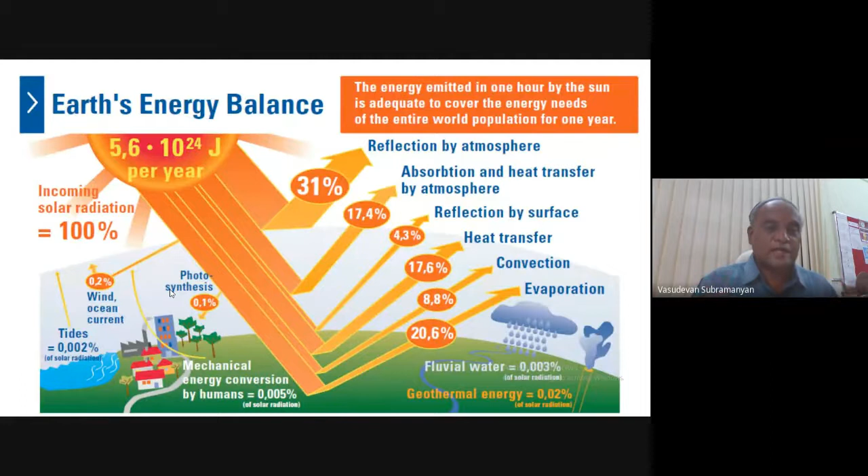Suppose we assume incoming solar radiation is 100%, but we are not utilizing the full 100%. We are utilizing only 0.3%. The remaining 99.7% is lost as reflection and absorption, reflection by surface, heat transfer, convection, and evaporation. Now every country is planning to utilize solar energy more fully. We use 0.2% from wind, 0.1% from photosynthesis, and some from tidal. Many efforts are going on, but we are unable to achieve 100% utilization of energy from the sun. So this is the thing about energy.

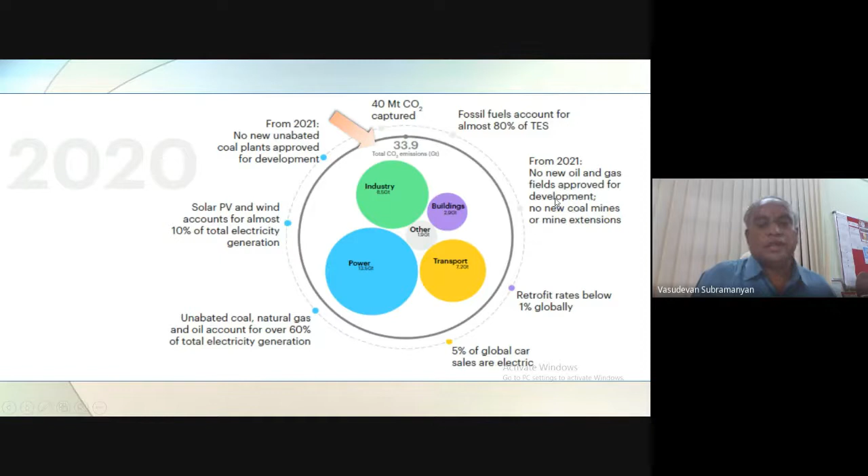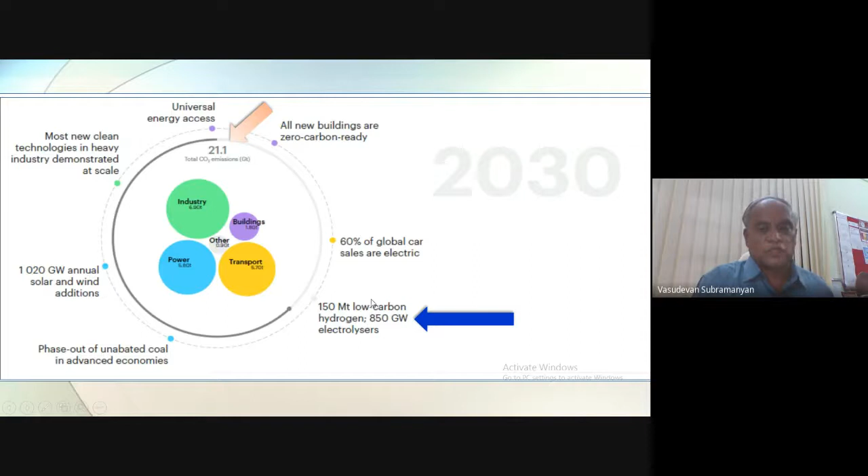That is 850 gigawatt electrolyzers are we are going to develop. So this is the impact we are reducing the CO2 in 2030. In 2040, we are still reducing to 6.3 gigatons of CO2 because of, you can see the electrolyzer capacity reaches 2,400 gigawatt, and oil demand is 50% of 2020 level.

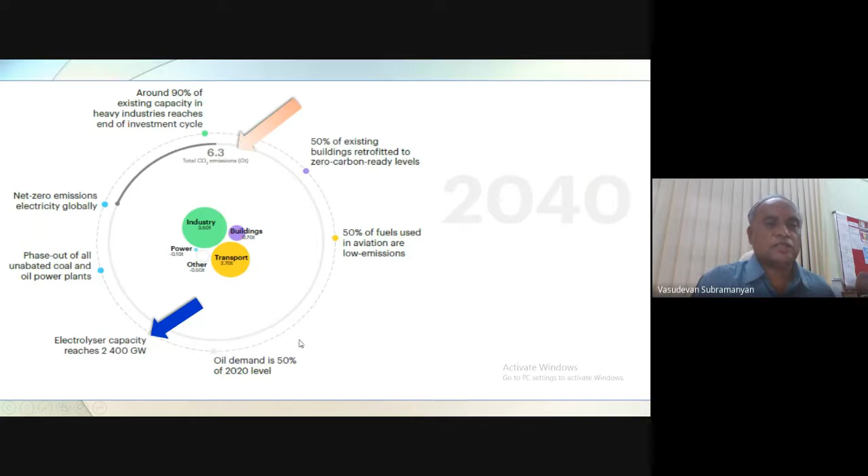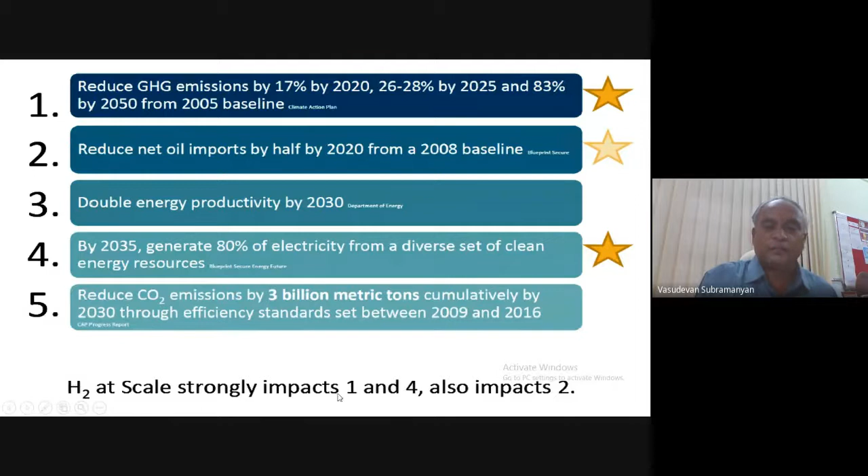You can see the SDG, they will call that how to reduce, and you can go for the SDG. There are reduce greenhouse gas emission by 17% by 2020, and 26 to 28% by 2025, and 83% by 2050 from 2005 baseline, and reduce net oil imports by half by 2020 from a 2008 baseline, and double energy productivity by 2030. So there are 5 points where hydrogen will be important, that is, hydrogen at a scale strongly impacts points 1 and 4, also impacts 2. So these are the 5 points where you can go for the SDG goal.

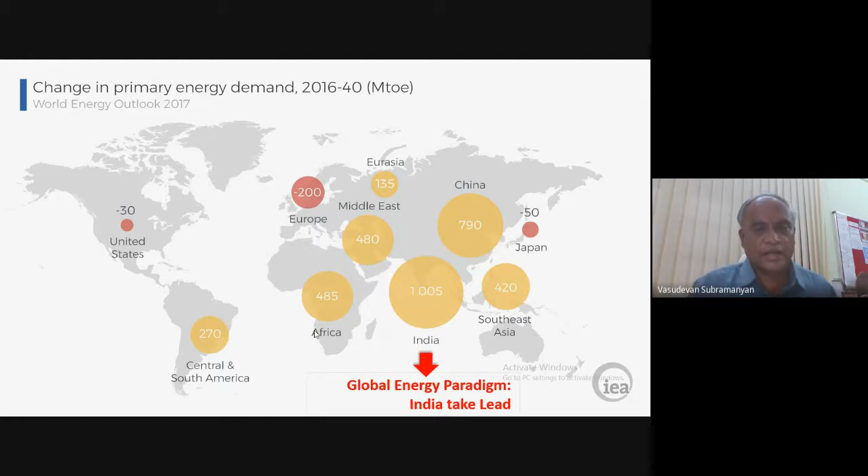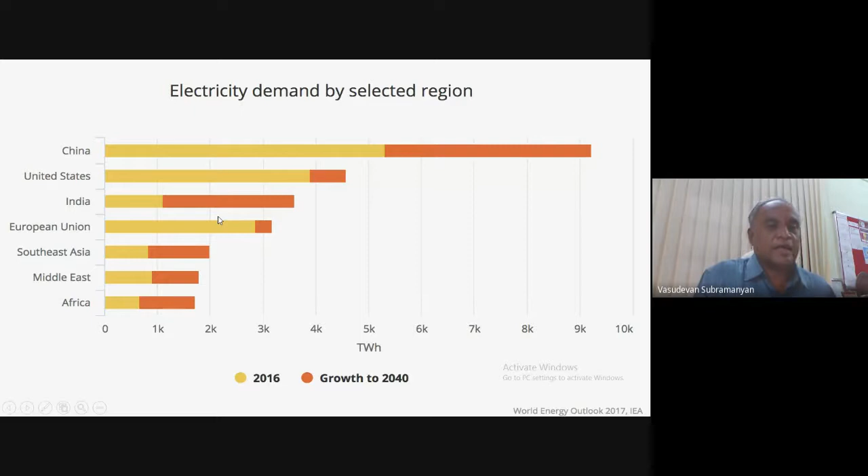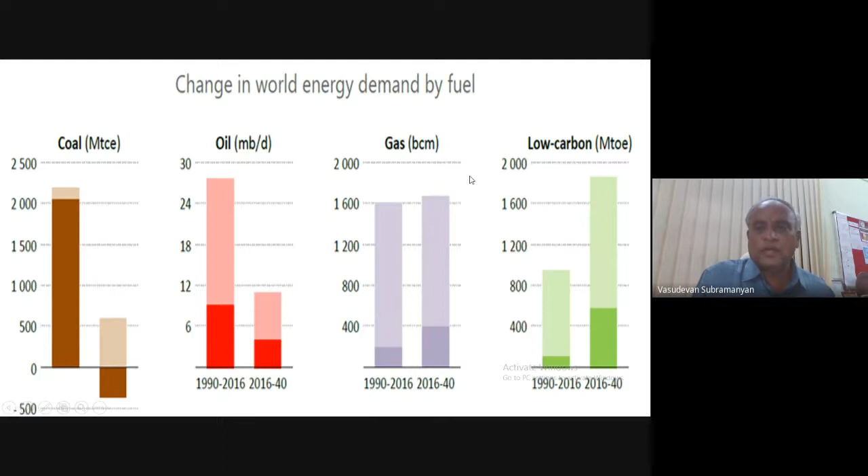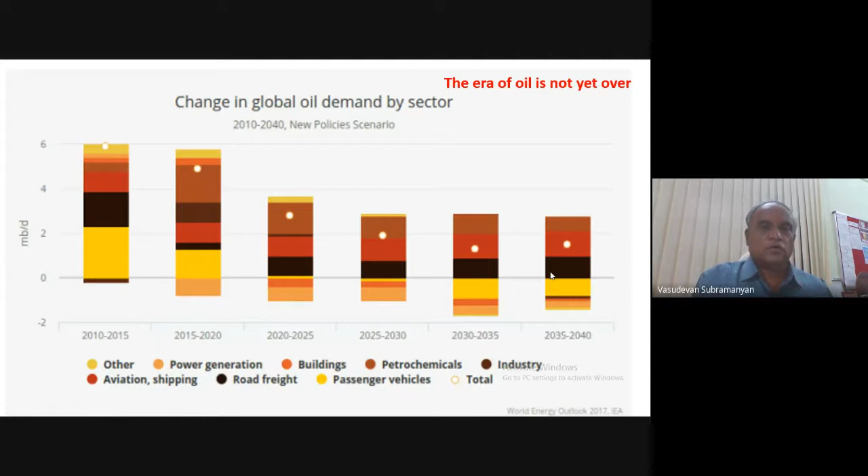And you can also reduce the CO2 emission by the demand by the fuel. So we are going for the low carbon fuel. By the way, you can reduce the CO2 emission. And this is the era of oil is not yet over like that. Even we are going on talking, we don't want to use the oil, but anyway, it is unable to stop the utilization of oil. You can see this graph, even though the oil requirement is on the negative side, but still some industries are required for the oil. So it is very, very difficult to omit the oil for some particular points.

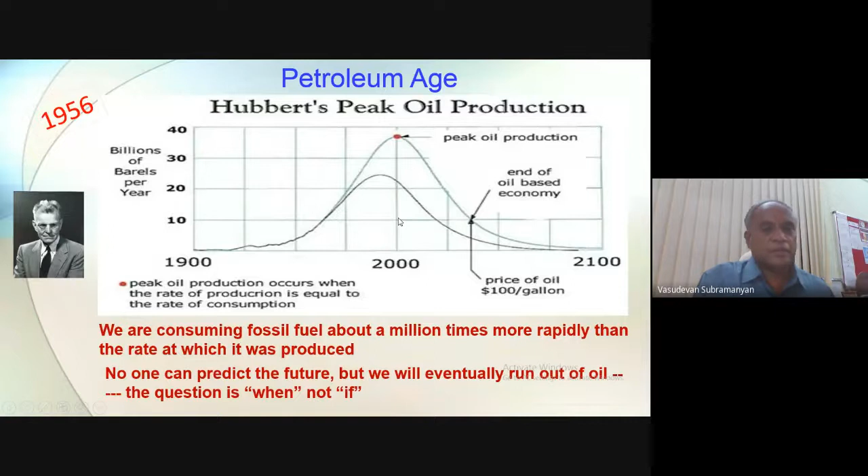You can see the petroleum age. Now we are talking about the hydrogen. It is really happening. You can see in 1956, the Hubbert's peak was detected, that 2000 is the peak oil production in this, and it is going on reducing. And you can see in 2050, the price of oil is $100 per gallon. But in 2100, we are expecting that the oil age will be reduced, and we are going towards the hydrogen as a gaseous oil.

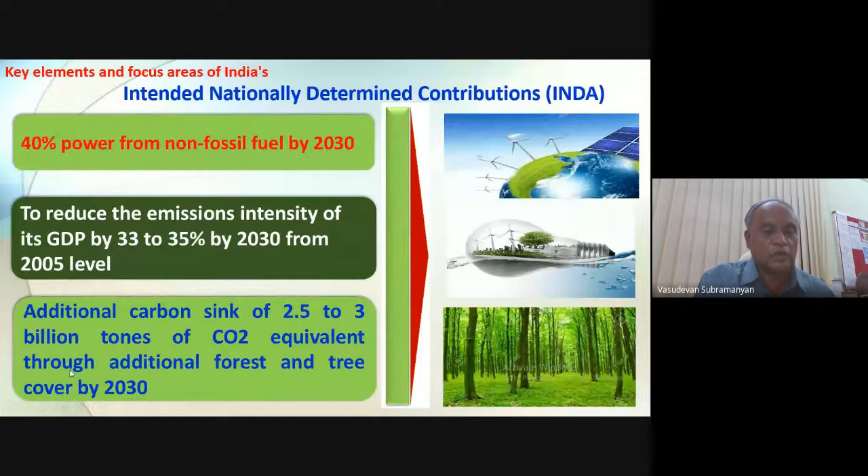And you can see the key elements and focus area for India's intended nationally determined contributions. That is how we are going to reduce the CO2 emission. That is 40% power from non-fossil fuel by 2030, and to reduce the emissions intensity of its GDP by 33 to 35% by 2030 from 2005 level, and additional carbon sink of 2.5 to 3 billion tons of CO2 equivalent through additional forest and tree cover by 2030.

So for this, what we are going to do in the near future, the thing is only the hydrogen. You can see we started with wood, and we went to coal, and we went to oil and natural gas. Now in 2020, we are talking about the hydrogen. So the only source to avoid the CO2 is, at present, we are focusing on the hydrogen.

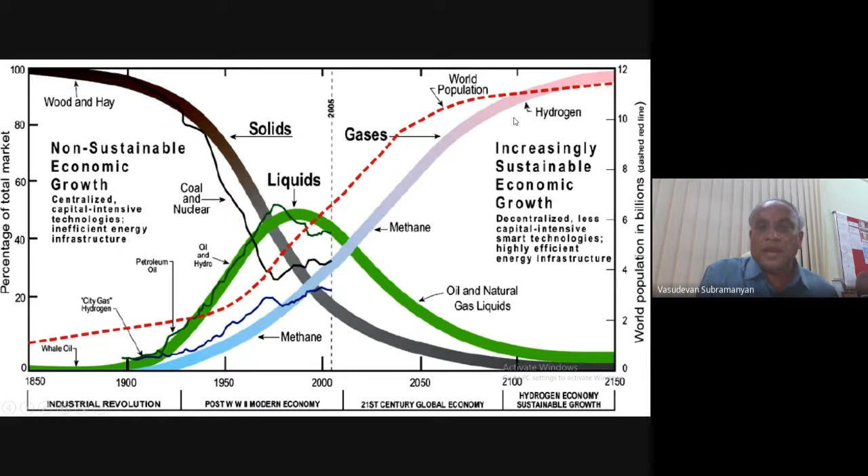And you can see this graph, it is typically predicting, no? You can see the liquid is going on diminishing, and you can see the solid, it is going on diminishing. You can see the gaseous fuel is going on increasing. So this graph shows it is perfectly aligning with this graph. Now we are talking, and in future, hydrogen is the main fuel for all our utilities.

Why are we talking about hydrogen so much compared to battery? You can compare the energy density, that is megajoules per kilogram. Lithium ion battery is 0.54 megajoules per kilogram, gasoline is only 46.9, but hydrogen is 140 megajoules per kilogram. That is 220 times more energy than batteries and 2.6 times more energy than gasoline. That's why we are talking hydrogen and hydrogen.

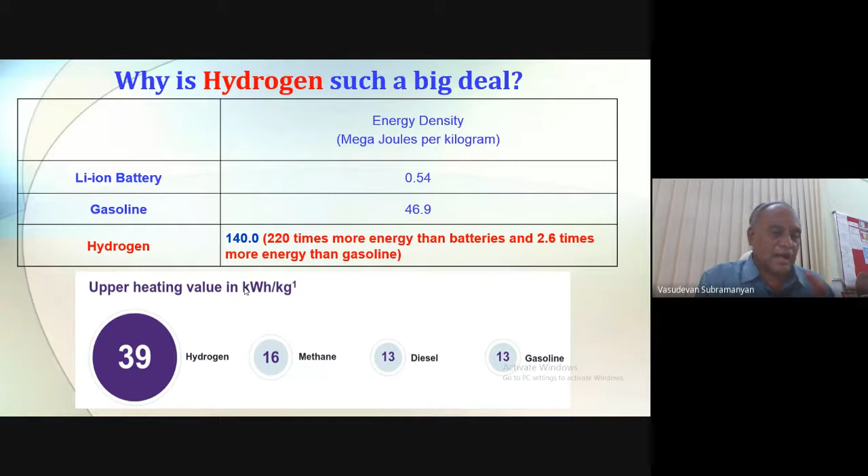You can see the upper heating value is 39 for hydrogen, and it is much lower for methane, diesel and gasoline. That's why we are all talking about hydrogen in the energy sector point of view.

What is the solution for that? That's why we are coming to hydrogen. Hydrogen is multifunctional - it connects energy, mobility and industry. That means you have to concentrate on production, transformation, transport and end use. In all these places, hydrogen is more multifunctional than other energy sources. That's why we are talking more about hydrogen.

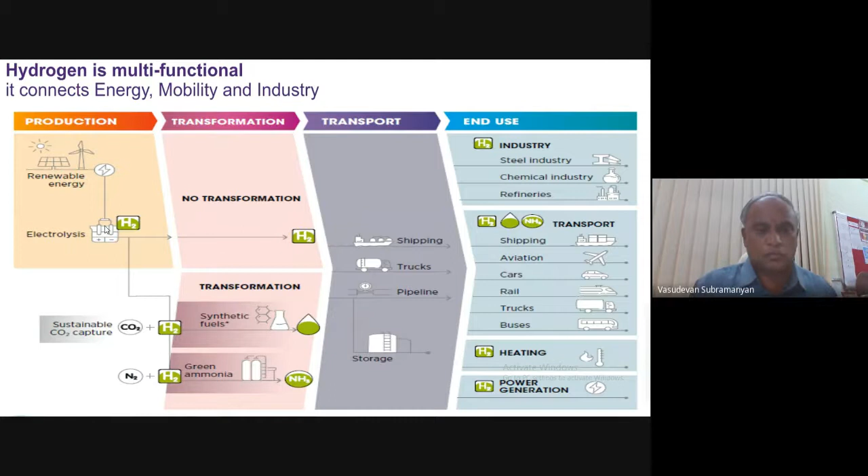So what are all the components when we talk about hydrogen? Before going to hydrogen, we have to take care of how to produce hydrogen, how to store hydrogen, and what applications we are planning - whether it is fuel cell or anything else. You have to go for awareness and capacity building, and also safety codes and standards. Once you start thinking of hydrogen, you have to go for all these things, then only can you use hydrogen in the real field.

If there is a lack in safety codes and standards, there is no use. If you are not giving awareness to the people, if you produce hydrogen, if you store hydrogen, there is no use. So all these points should be covered in hydrogen energy systems.

In the case of production, as the speaker told, hydrogen production origin will be sorted by color - green, gray, blue, yellow, brown, black, pink, white and some other colors. In all these cases, CO2 will come, but only in the production of green hydrogen - that is by electrolysis of water using electricity from renewable energy like wind, solar or hydropower only - there is green hydrogen production.

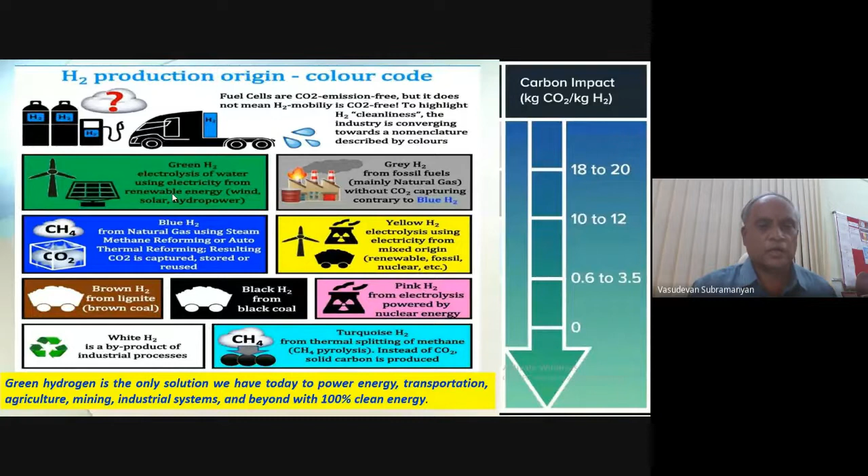In this green hydrogen production from electrolysis, we have been doing research for the last 2 decades. I am going to talk more about what is our contribution from CECRI in the electrolysis point of view. And you can see the electrolysis.

In 1874, Jules Verne predicted: 'I believe that water will one day be employed as fuel, that hydrogen and oxygen which constitute it' - that is called, we are talking about the fuel cell - 'used singly or together will furnish an inexhaustible source of heat and light of an intensity of which coal is not capable.' This statement was given in 1874 itself by Jules Verne. I am sure that in 2050, water will replace fossil fuels as a primary resource for hydrogen.

In the case of production, there are 3 types of electrolyzers - one is called alkaline electrolysis, another is PEM electrolysis, and high temperature electrolysis. We at CECRI do alkaline electrolysis and PEM electrolysis. The difference is in alkaline we are using KOH, and in PEM it is the polymer membrane. There are so many parameters that are same and different. We at CECRI are concentrating on alkaline electrolysis and PEM electrolysis.

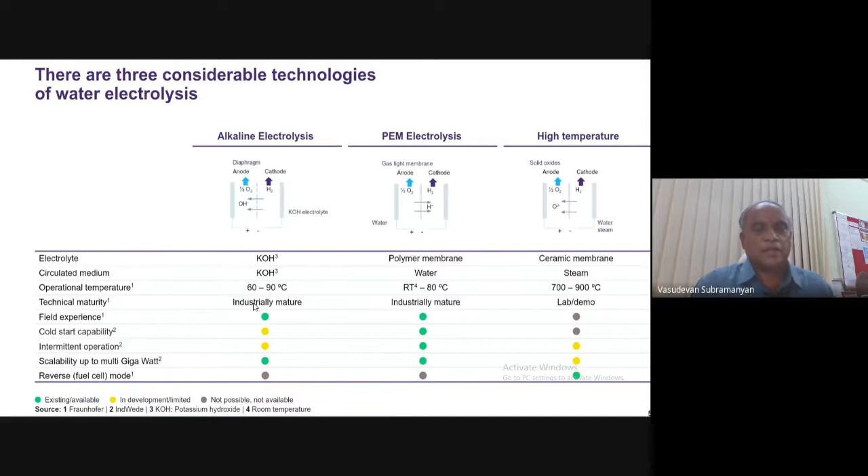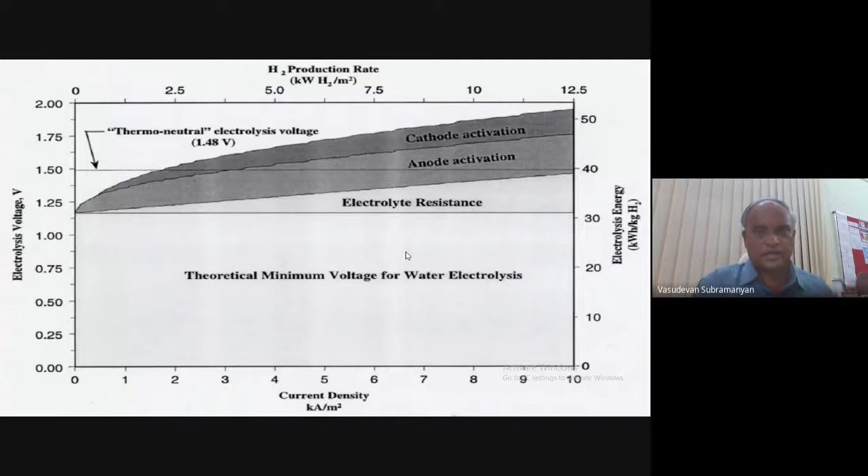If you take the energy point of view, to generate hydrogen we want 1.48 volts, and the theoretical voltage is 1.23. This 1.48 is the minimum voltage required for hydrogen. From this you can calculate the energy consumption, the hydrogen production rate - that is kilowatt hour per meter cube or per kg of hydrogen. You have to calculate all that from this graph.

Suppose the production of hydrogen from renewables with electricity, what are all the available technologies? You can use electrolysis, using the power of hydropower, wind power, biopower, geothermal power, solar power, or solar thermal power. These are the technologies available for production of hydrogen with electricity. We can say this is called renewable, that is green hydrogen. So you can go with production of green hydrogen with electricity or without electricity.

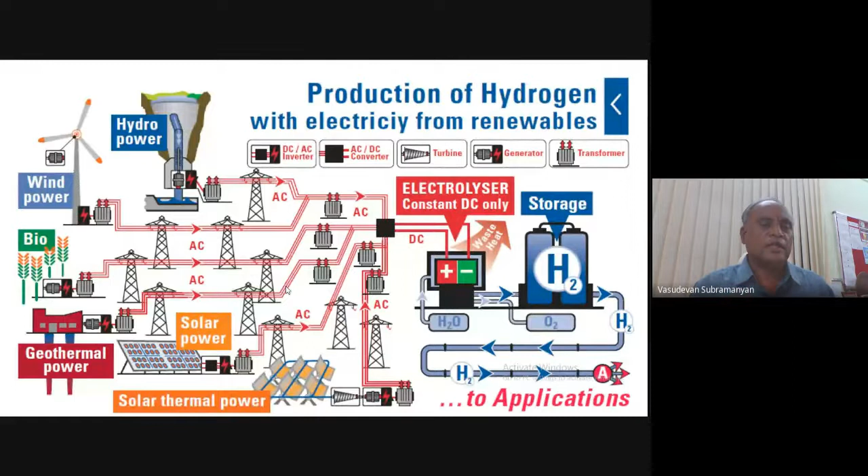This is very important for students doing their PhD and other master's degree programs. So what is going on in the alkaline electrolyzer? You can see this schematic diagram: this is the diaphragm, this is the anode side, this is the cathode side. If you pass 25% of KOH or NaOH, and use a nickel based catalyst at 1.7 to 1.9 volt, you can get hydrogen at a rate of 4.3 kilowatt hour per meter cube of hydrogen.

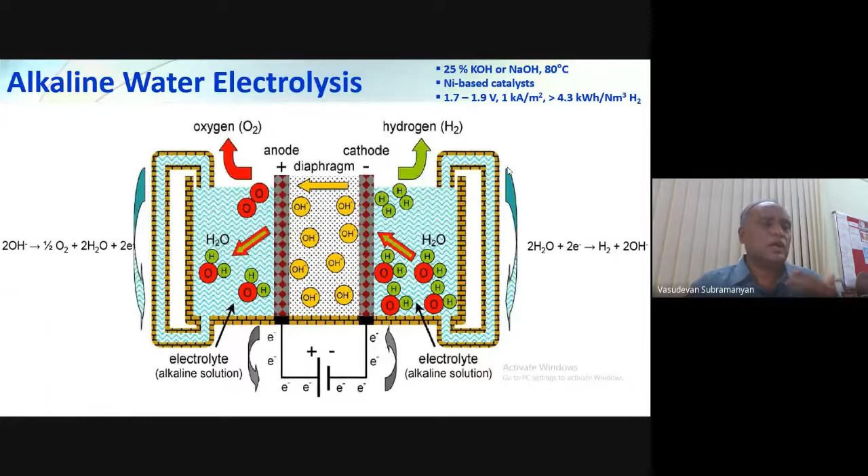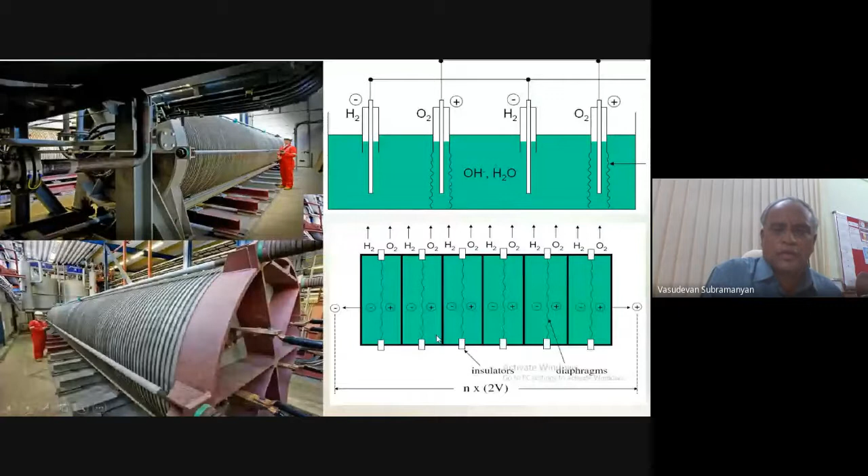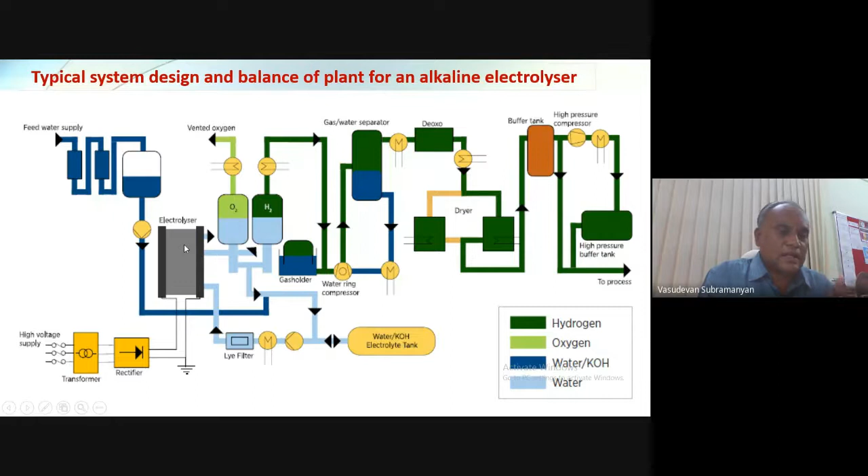So this is the present situation of alkaline electrolysis. What we are doing at CECRI in the case of alkaline electrolysis is, this is the schematic industrial alkaline electrolyzer. You can make the electrolyzer in monopolar or bipolar configuration. This is the typical system design and balance of plant for the alkaline electrolyzer. This is called the electrolyzer. At CECRI we are concentrating only on the electrolyzer part. All the remaining plant we are ready to give as the design. We don't have any module design at CECRI. We have the electrolyzer, alkaline electrolyzer technology with CECRI.

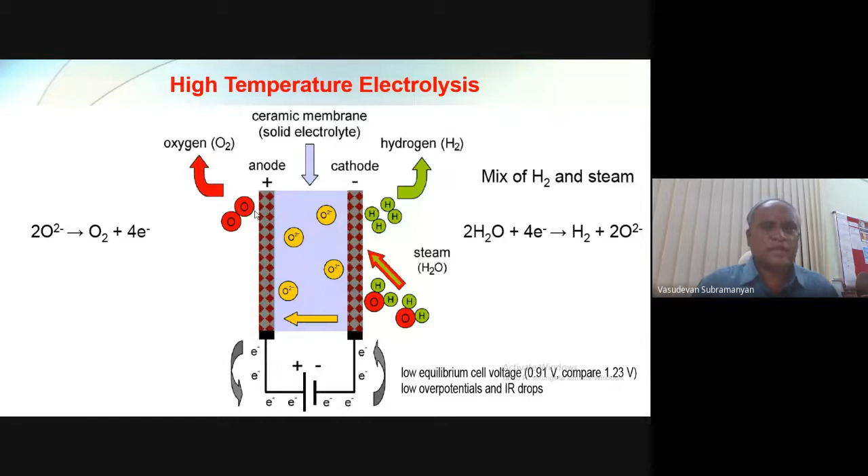So this is called high temperature electrolysis. We are not doing any work on high temperature electrolysis. Here the ceramic membrane is the solid electrolyte, and almost the system is the same as alkaline water electrolysis.

And we are fully concentrating on proton exchange membrane electrolyzer. Here the electrolyte is the solid polymer electrolyte. But in the case of alkaline, we use a liquid electrolyte. In the case of PEM electrolyzer, the electrolyte is just a polymer electrolyte. Here also we are generating hydrogen and oxygen.

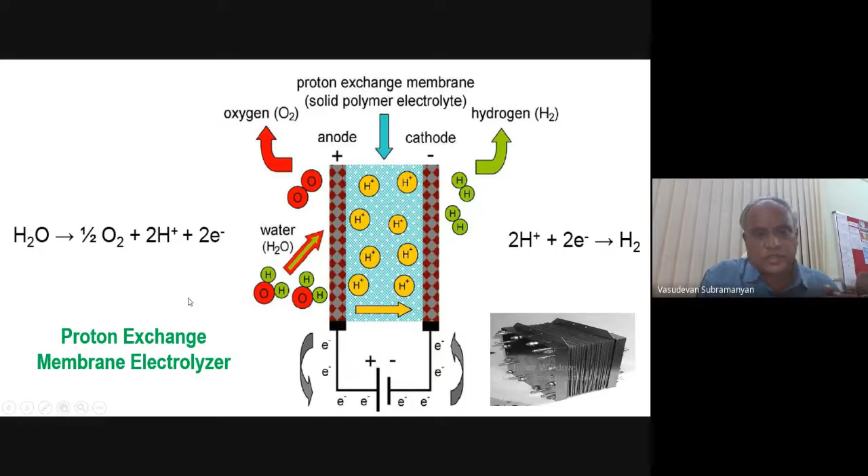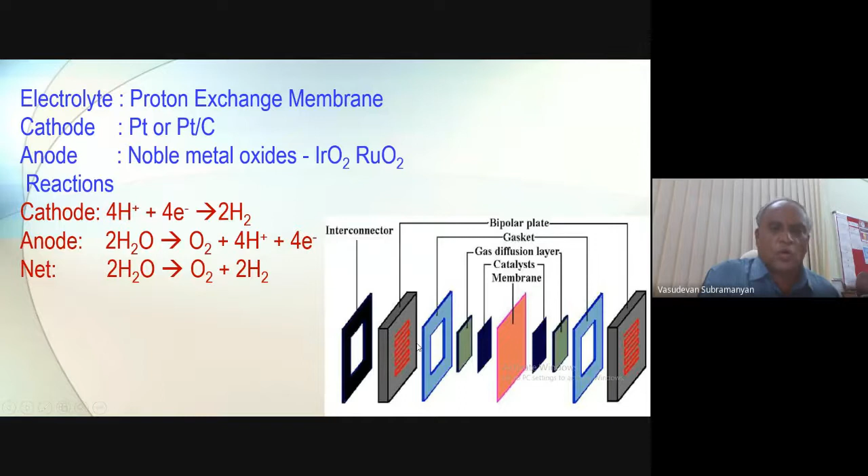What CECRI has in this technology is simple. A noble metal oxide catalyst is used as the anode catalyst, and cathode is platinum based. In the cathode, hydrogen will be developed. In the anode, oxygen will be developed. If you talk about cathode, nickel is used as the catalyst for the alkaline electrolyte, and noble metal is used as the acid electrolyte. Acid electrolyte is nothing but the PEM electrolyte, that is called proton exchange membrane electrolyzer.

So based on this concept only, we developed the electrolyzer technology. And we are going on doing research on how to reduce the cost of the electrolyte or cost of the catalyst. For that, we are using carbon supported noble metal catalyst. We have done thousands of developments in the electrocatalyst part, both in the cathode and anode side.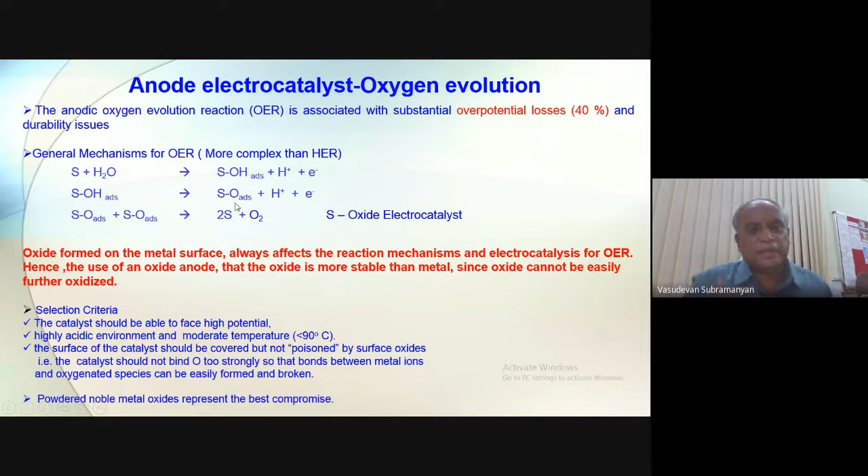For that, we have also tried many catalysts. You can see the OER, that is oxygen evolution, will take place. The catalyst type can be rutile type, perovskite type, or spinel type, and either of these you can use. This is a very good research component for the students: you can try rutile type, perovskite type, or spinel type. We have tried that, and we have our own catalyst in our electrolyzer.

On the hydrogen side, you can use carbon paper, but on the oxygen side you can't use carbon paper. You can use the metallic current collector. A lot of research is going on here.

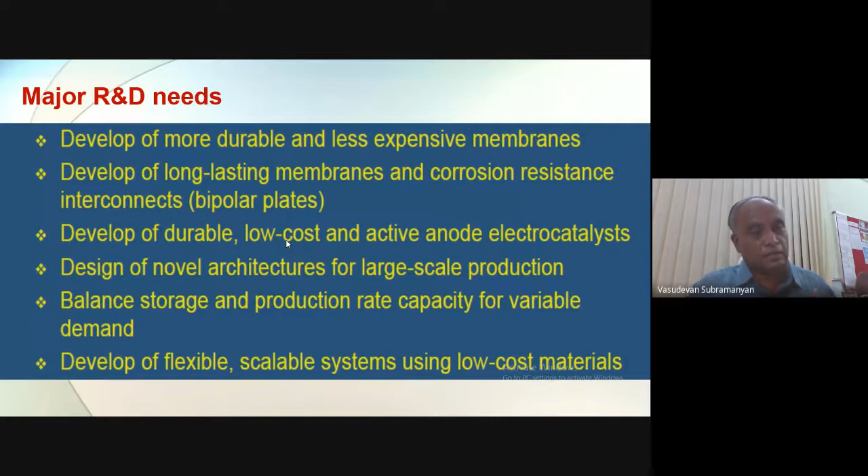The major R&D needs are to develop a more durable and less expensive membrane, and a long-lasting membrane. Still, we are importing the membrane from foreign countries; there is no indigenous membrane. You have to develop a durable, low-cost and active anode catalyst, and design novel architecture for large-scale production, and balance storage - develop a flexible, scalable system using low cost. Even though we have developed the electrolyzer, we need more R&D in this line.

This is the first prototype model developed at CECRI. It gives 0.02 meter cube per hour. This was developed around 2005 or 2006. So all these things we have developed at CECRI.

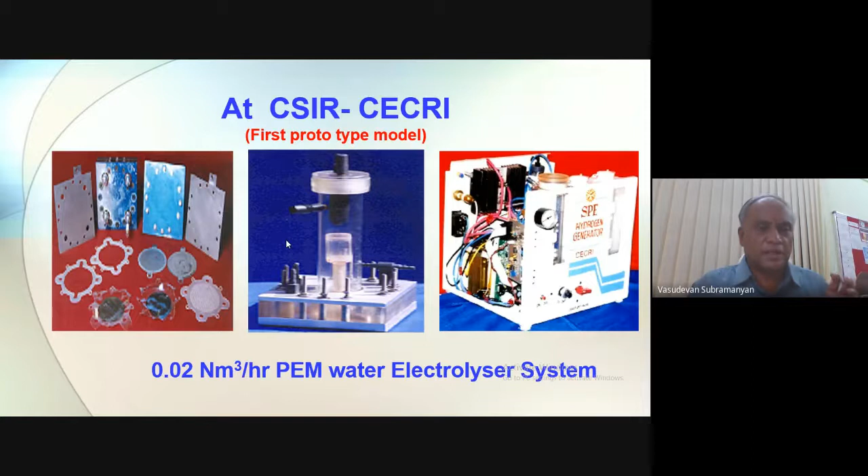We checked after doubling and the performance was okay. After that, we went ahead with the 0.08 meter cube per hour PEM electrolyzer. We succeeded in this also, and you can see the 1 meter cube per hour PEM water electrolyzer unit that was developed. These are all our students.

You can see the facility. This is a compact model of 0.1 meter cube per hour PEM water electrolyzer. This is the water electrolyzer. All other things are the electronic circuits and rectifiers.

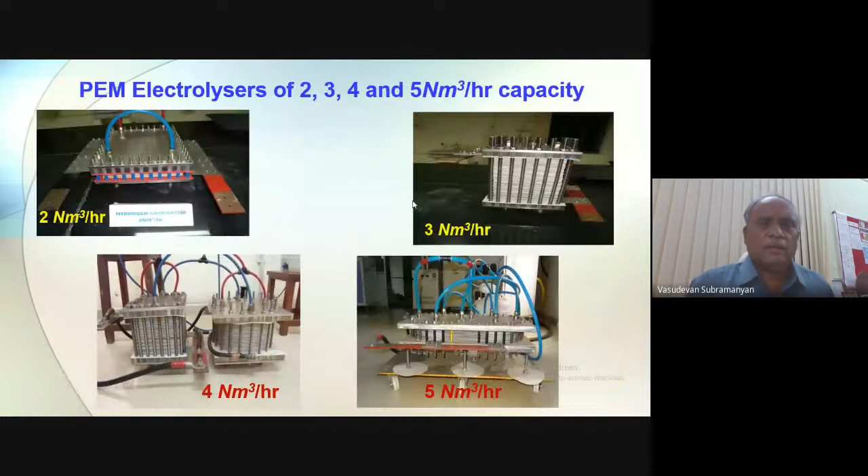This is our lab, and the students are actively participating in our development. We have developed up to 2, 3, 4, and 5 meter cube of hydrogen. This is the model, and this is the technical specification.

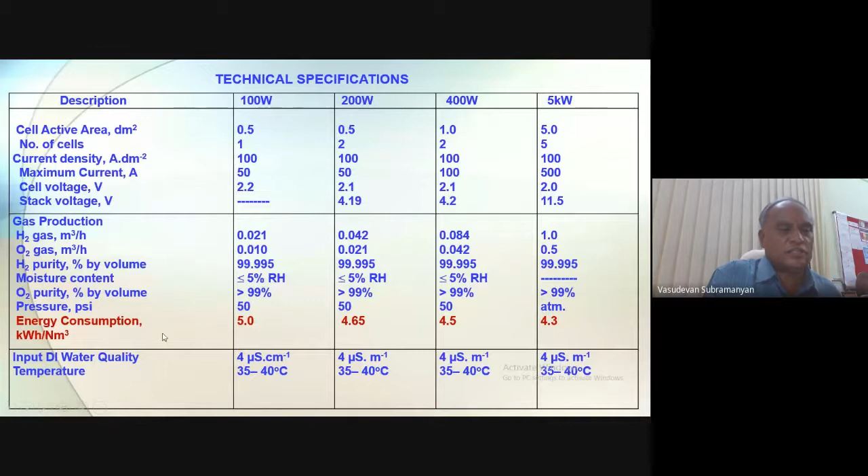You can see we are getting high pure hydrogen. The purity is on par with international standards. The energy consumption is 5 kilowatt hour per meter cube in the case of our electrolysis.

This technology was also transferred to one of the leading companies in India, a PEM electrolyzer company called Eastern Electrolyzer Limited, and they have installed our electrolyzer technology in Oman. This is our technology, and all other parts are done by Eastern Electrolyzer. Now the Indian product is installed at the international level. Our CECRI technology is very competent with the international level.

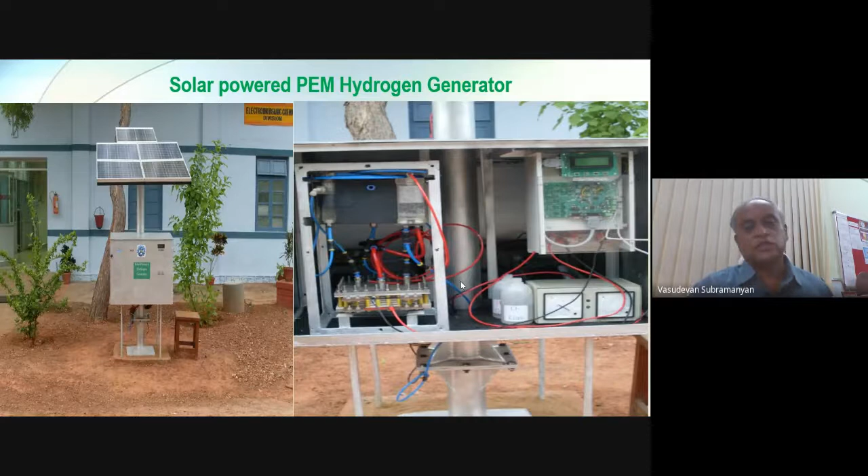So this is our solar powered PEM hydrogen generator. Now we are testing our electrolyzer integration with solar power. You can see the big solar power installation, and this is our electrolyzer. The testing is going on continuously. We have the demo setup in our institute.

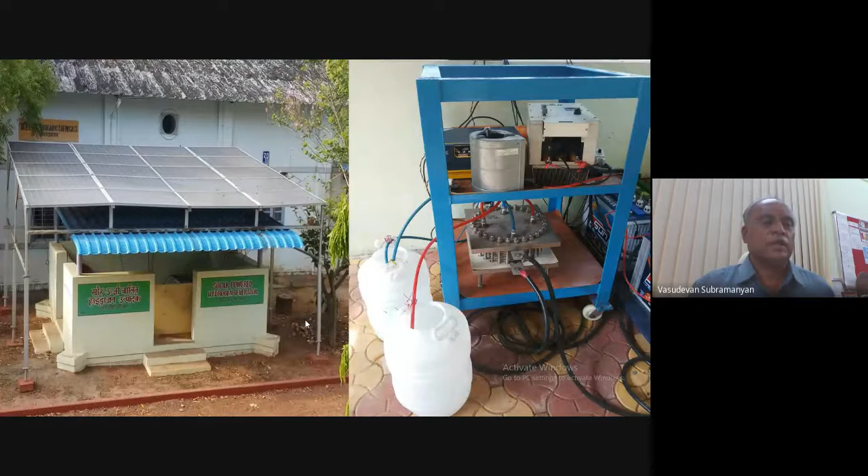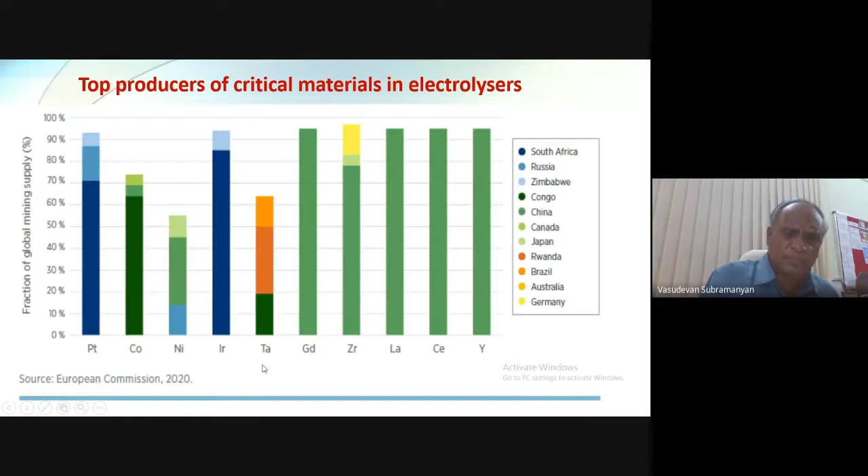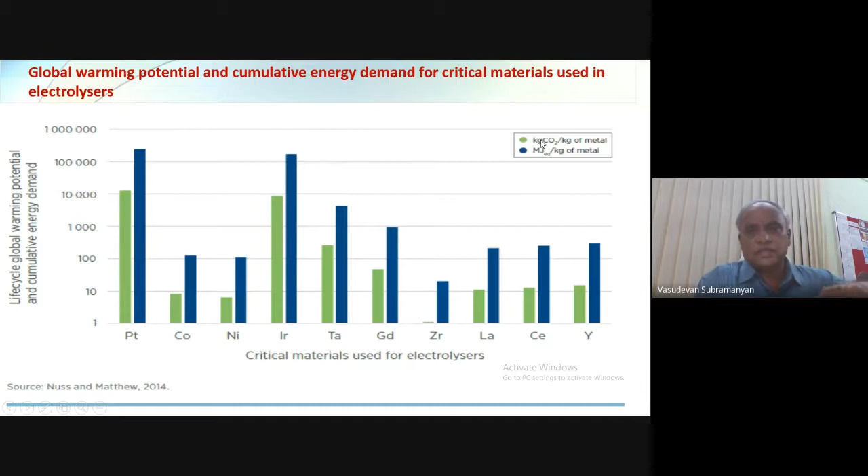Apart from this, even though we talk about hydrogen being CO2 net zero, suppose you want to prepare this type of catalyst, you have to generate CO2. So indirectly we can say hydrogen is CO2 free, but if you look at the raw material, the CO2 is still coming from it, because it comes as kg of CO2 per kg of the metal.

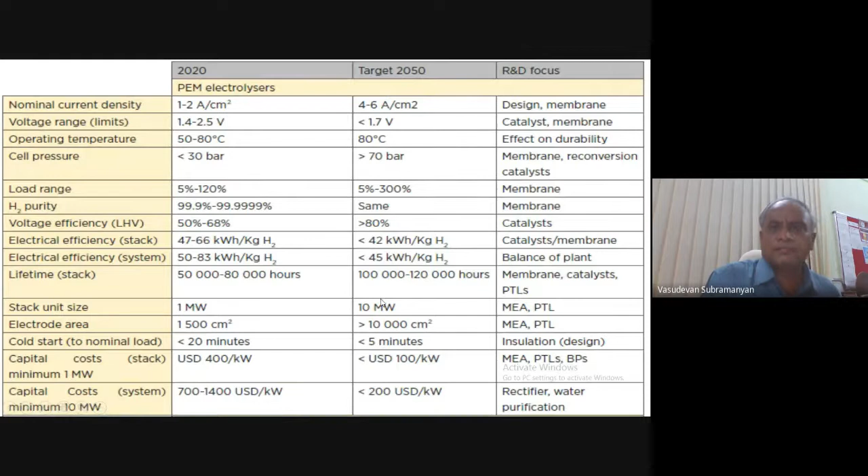You can see how much precious metal is required for the PEM electrolyzer, and this is the target. This is the present energy scenario, and this is the target for 2050, and the R&D focus required for the target of 2050. We are also working towards the target of 2050 at CECRI.

This shows the different manufacturers all over the world, like Proton and others. So the CSIR-CECRI product from India is also one of the competent products for the international market.

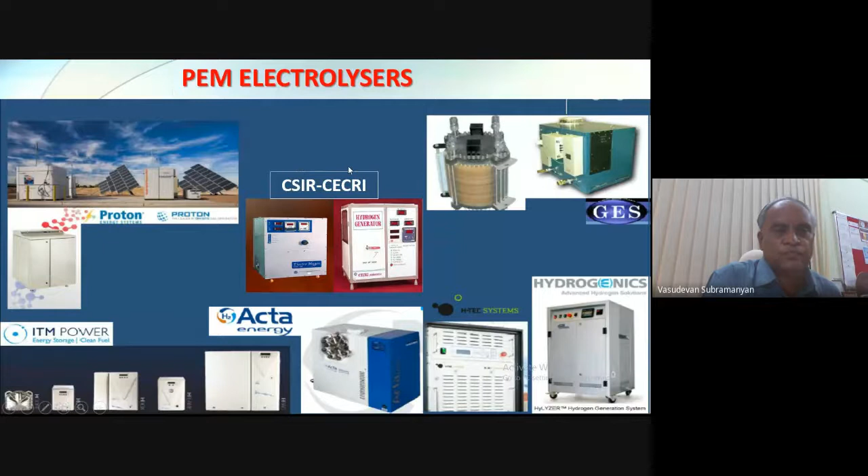This is another system called the AEM electrolyzer - anion exchange membrane electrolyzer, like the PEM electrolyzer. You can see it being used all over the world, in Germany, Norway, Denmark, UK, Belgium, Canada, so many places - PEM electrolyzer or alkaline electrolyzer, something is going on. In India, at CECRI, we have the technology for both PEM and alkaline electrolyzer.

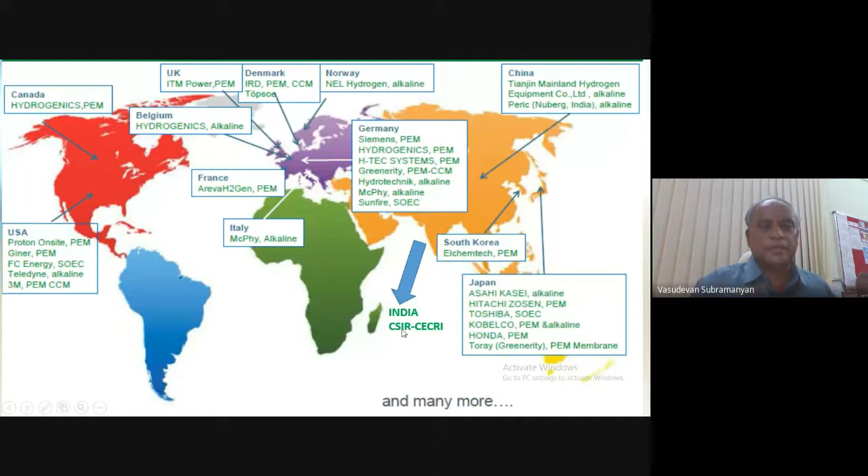And apart from that, now we are using pure water. So with the PEM electrolyzer, the cost of water also takes place. That is 15% of the hydrogen production cost will go for the water.

So what we are thinking is an alternate approach: selective seawater oxidation, whether it is possible to use seawater as the source for the hydrogen generator. For that we are doing research, because if you go for seawater, you can get only chlorine, we can't get the oxygen. For that we need compact research to go for the oxygen evolution reaction.

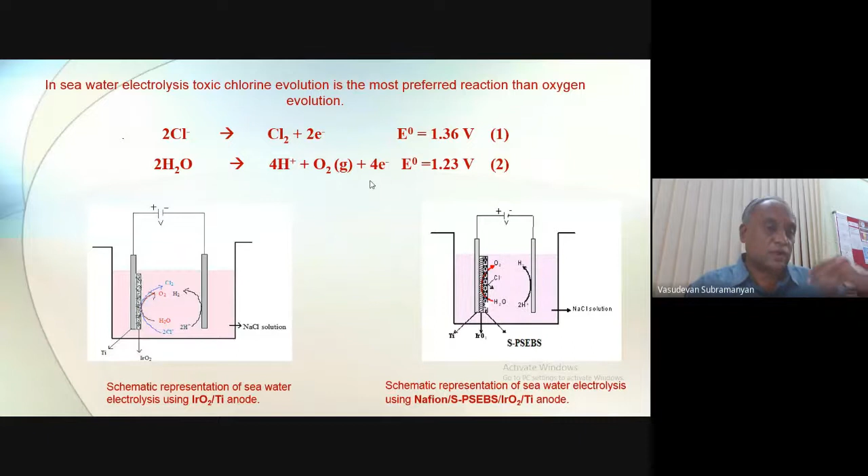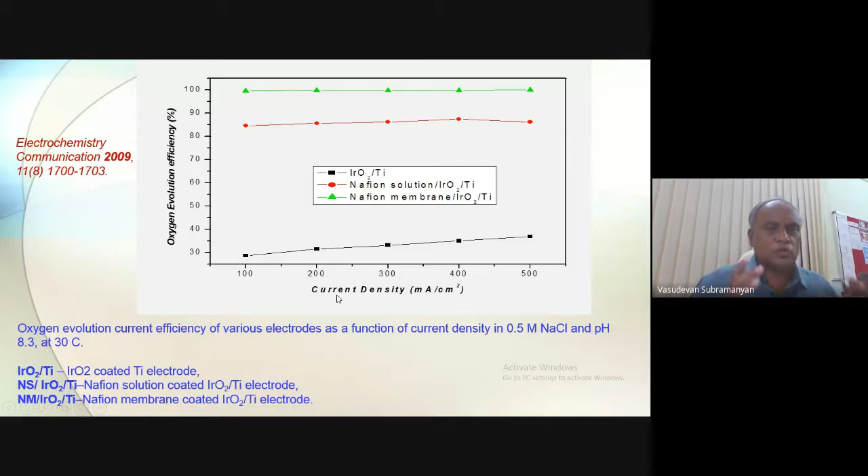So in that, we are doing a lot of research on hydrogen generation from seawater, and we succeeded. You can see our publication in 2009. In 2009 itself, we succeeded in suppressing the chlorine, and we achieved 100% oxygen. So this is the laboratory scale research. We are able to do hydrogen generation from seawater.

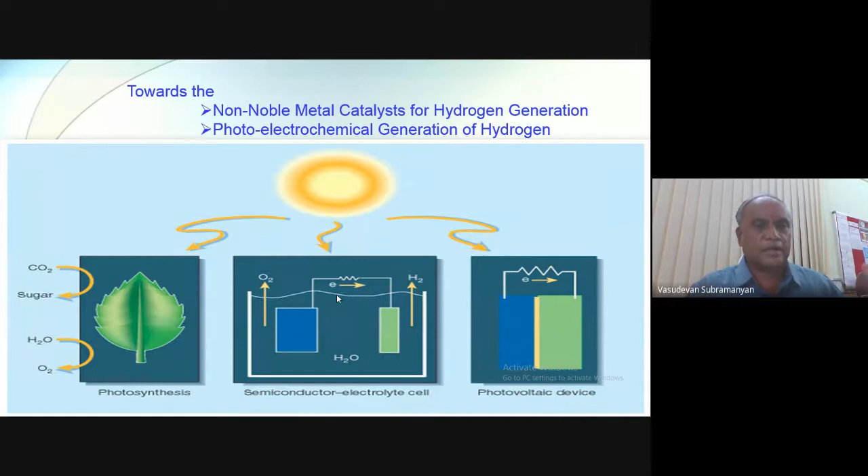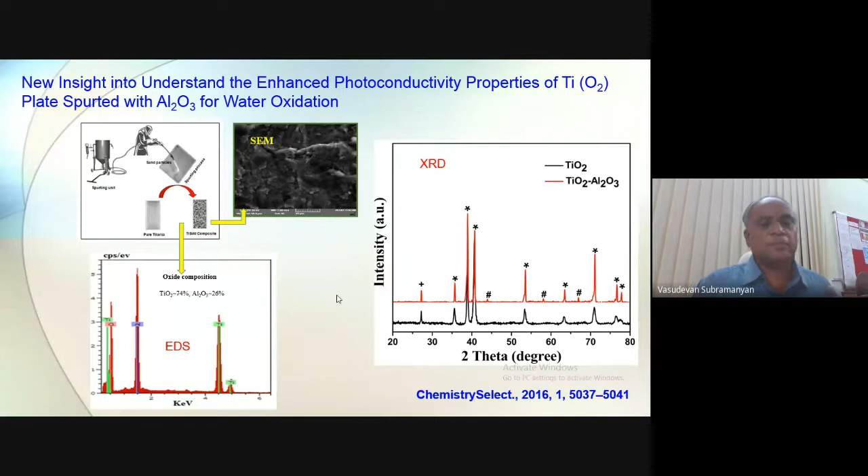And also we are going for non-noble metal catalysts. As I told in the earlier slides, we were using noble metals. We are now concentrating on non-noble metal catalysts, and also on utilizing photoelectrochemical generation from sunlight. For that we are using different types of catalysts like TiO2, SiO2, and also Al2O3. So all these processes are very simple processes as we go for the non-noble metal catalyst. These are all ongoing research, not yet at the present technology level.

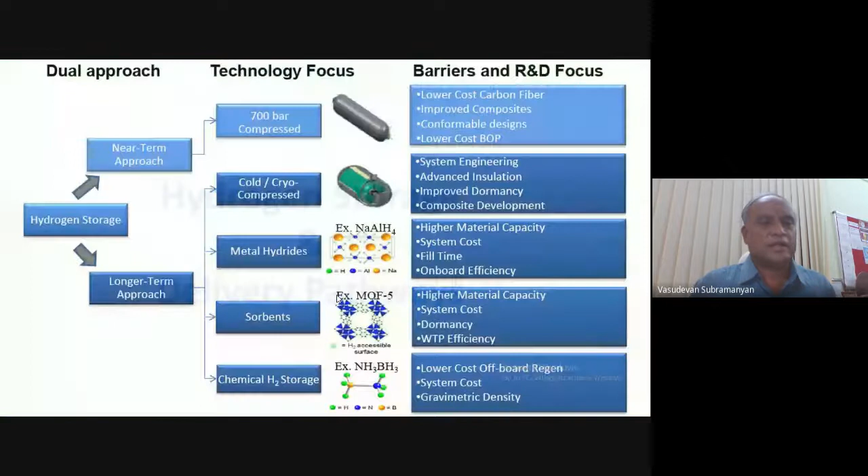And once you produce hydrogen, what about storage? We are not doing any hydrogen storage work, but as a literature survey, you can store it through a dual approach, either near-term or longer term. Either you can use cylinders, or cryo compressed engines, or metal hydrides, or sorbents, or chemical hydrogen storage in the form of ammonia. So there are a lot of options available for storage technology.

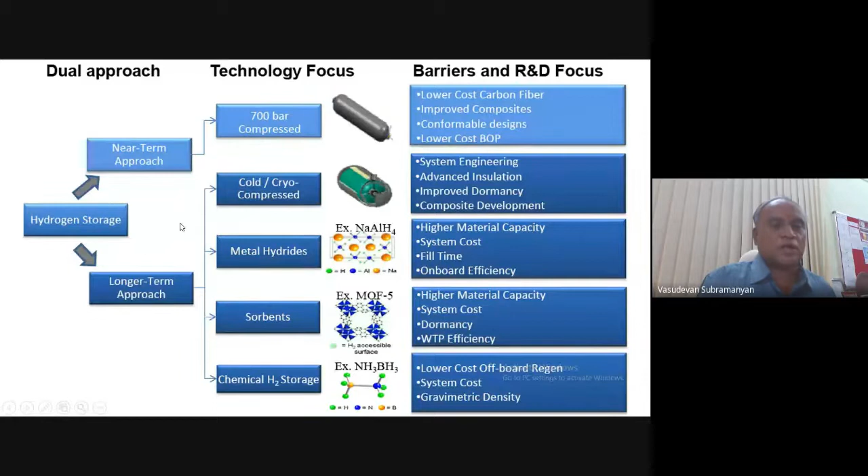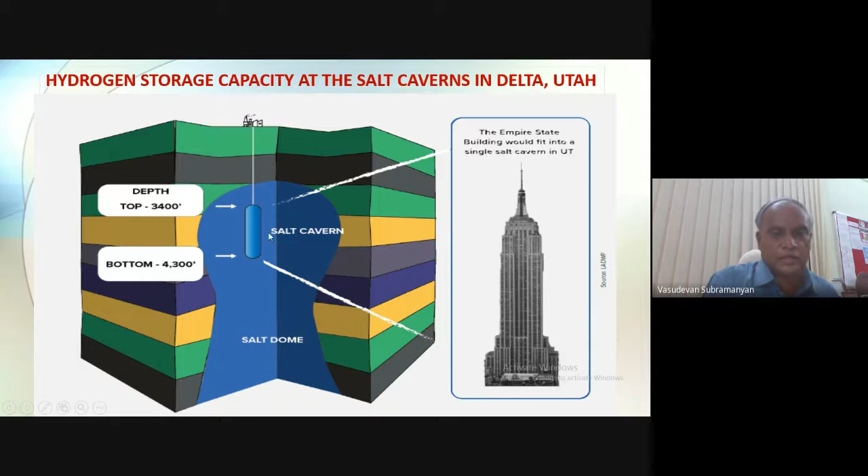At CECRI, we are not doing any storage work. Recently in foreign countries, there's a new concept called hydrogen storage capacity in salt caverns, in Utah. You can see this is the salt cavern, where they are storing the hydrogen. Bulk underground hydrogen storage in salt caverns has been demonstrated as a safe and effective process in the USA, as seen at the subsurface Texas facility. They have successfully stored hydrogen in the salt cavern. This is the demo plant available in the USA. I think India can also try hydrogen storage in this way.

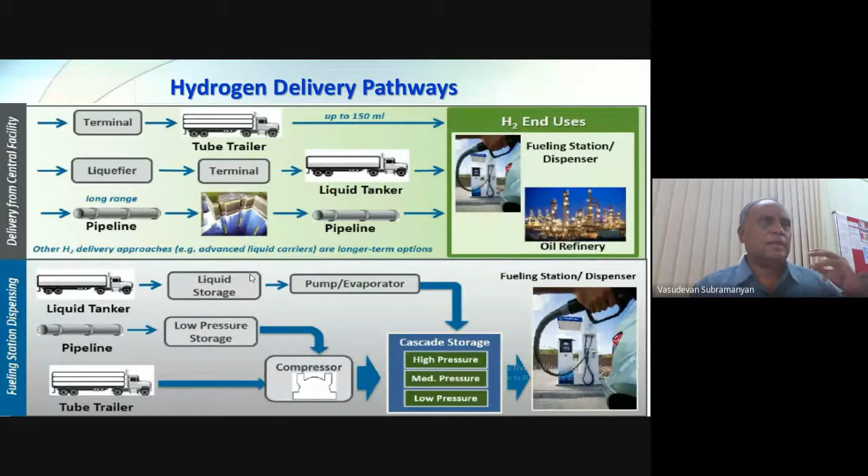And for the delivery path, you can deliver hydrogen either by tanker or pipeline. There are many methods available. Still, India is working on this development.

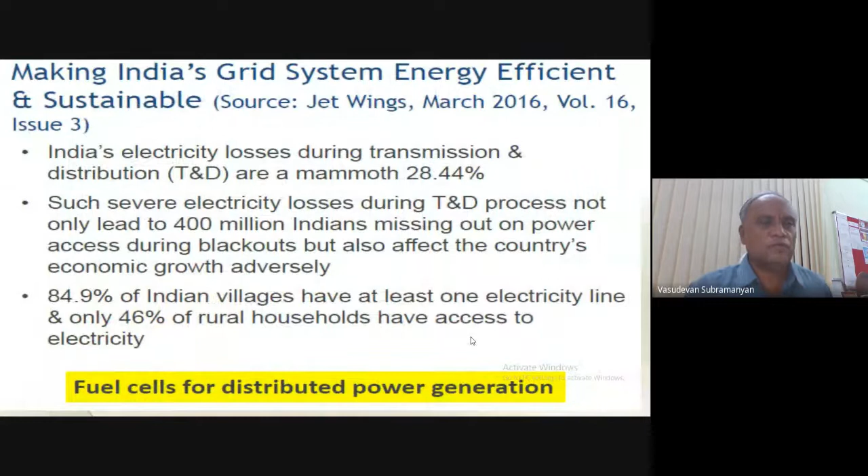If you take hydrogen applications, as many of our speakers have told, the applications are huge: fuel cells, electric cars and hydrogen electric trucks, hydrogen liquid ammonia, green steel, refineries, and also home use of hydrogen for heating and cooking purposes. So now we are making India's grid system for using hydrogen.

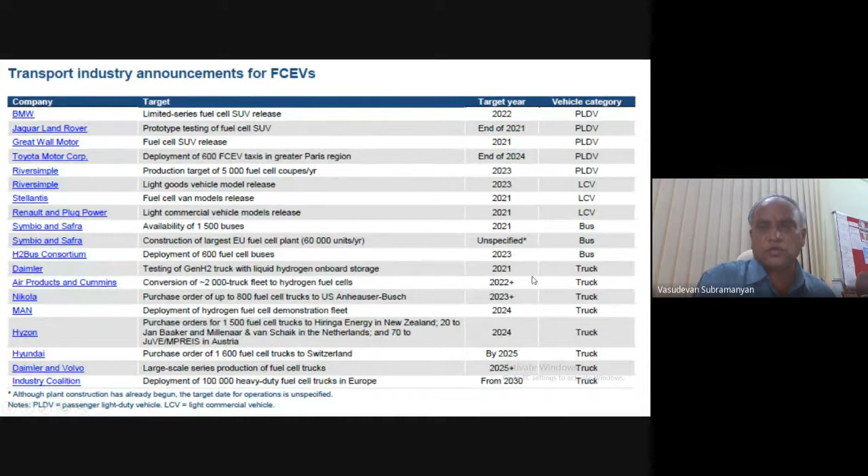Very recently, India's first hydrogen fuel cell electric hybrid car was run in Pune using our technology. SICRI and NCL Pune, in joint venture with one industry, operated the electric vehicle. Various transport industries have announced fuel cell vehicles in different countries, giving target years like 2022. So it is going ahead in India, along with our fuel cell research and applications.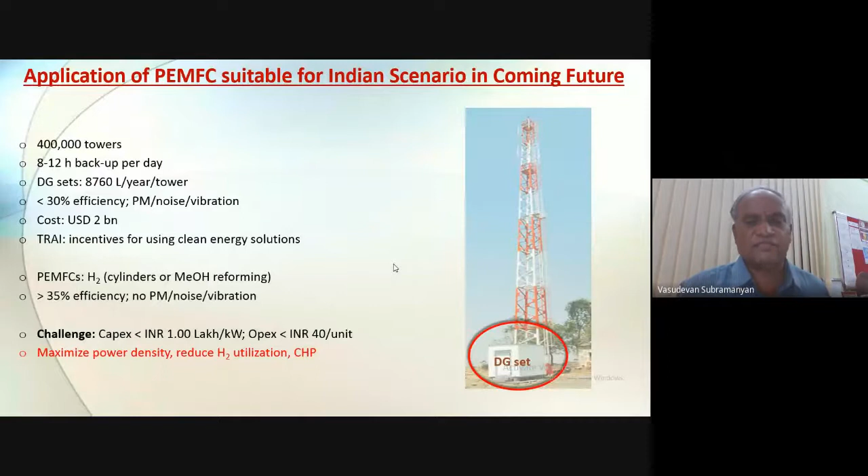If you see in the telecom tower, fuel cells are very useful there. And you can see where hydrogen will be useful.

Hydrogen will be used for full size trucks, not in the case of personal mobility. Normally in small cars, batteries will be used. For long range buses, hydrogen will be the only choice.

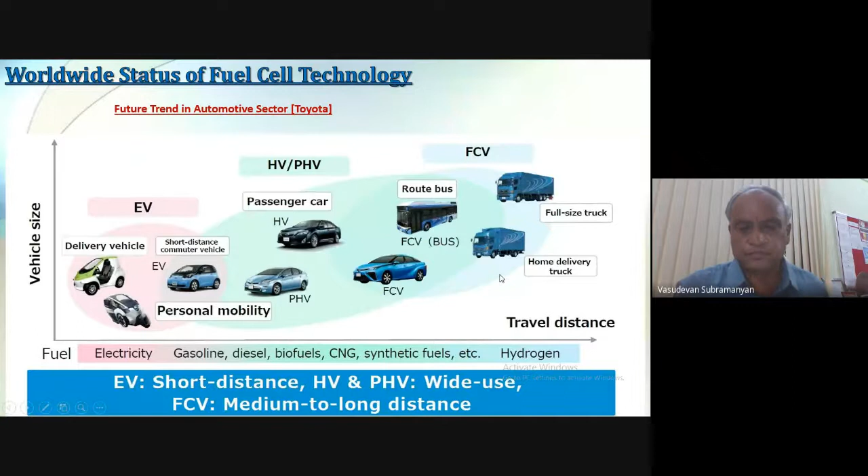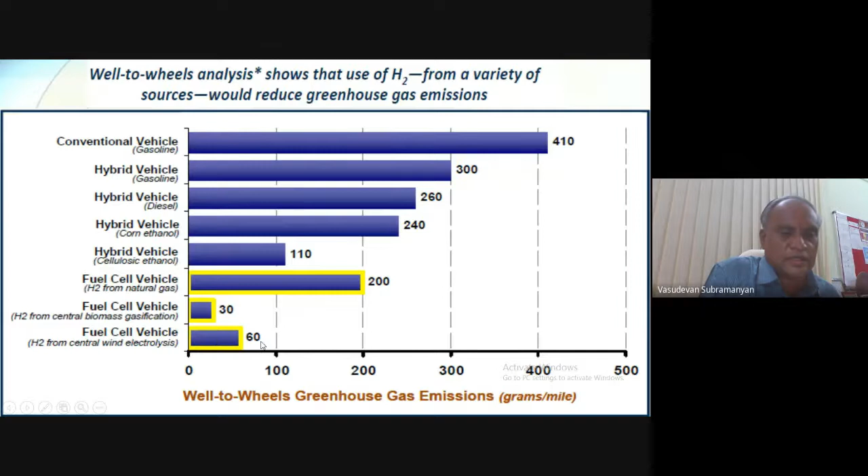Here you can see the fuel cell vehicle with hydrogen from natural gas means CO2 emission was more. Fuel cell vehicle with hydrogen from central biomass means 30. Fuel cell vehicle with hydrogen from electrolysis is 60. Even with fuel cell, if you do hydrogen from natural gas only, the CO2 emission will be more.

So to conclude, electrolyzer and fuel cell, this is the demo system. We have integrated both, and if you go for the hydrogen energy roadmap...

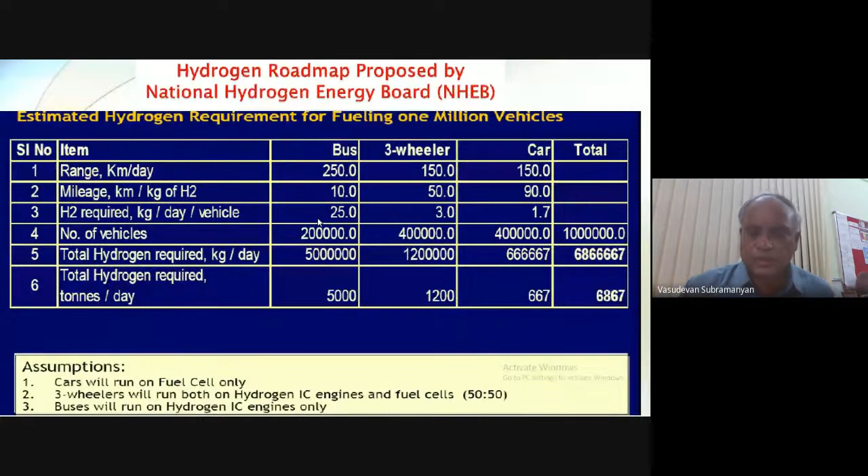India is going for hydrogen. You can see India's goal. We want only 7,000 tons if you want to plan.

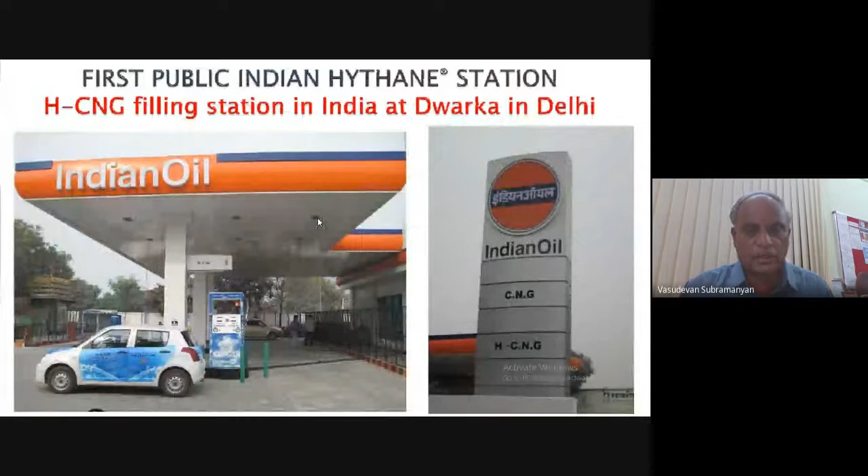This is the hydrogen fueling station of Indian Oil Corporation. These are all the ongoing research or installations going on in India. Even Indian Railways is planning.

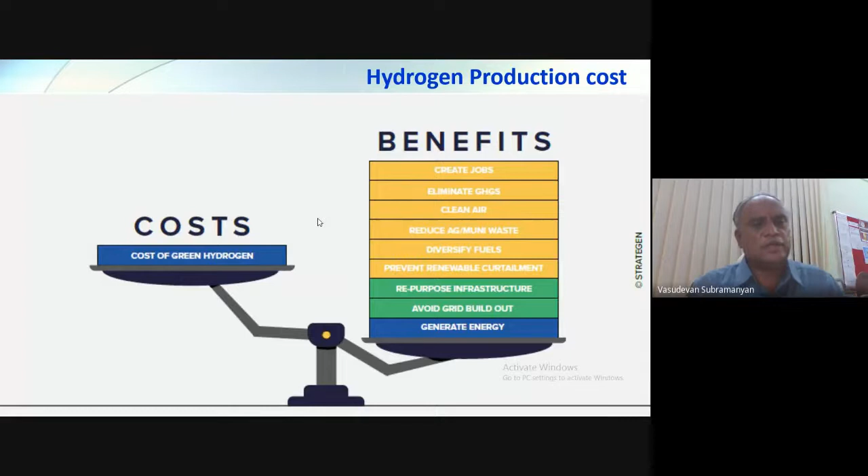You can see cost-wise, people are talking about the cost, even though there is cost, the benefits will be more. You can see the cost development.

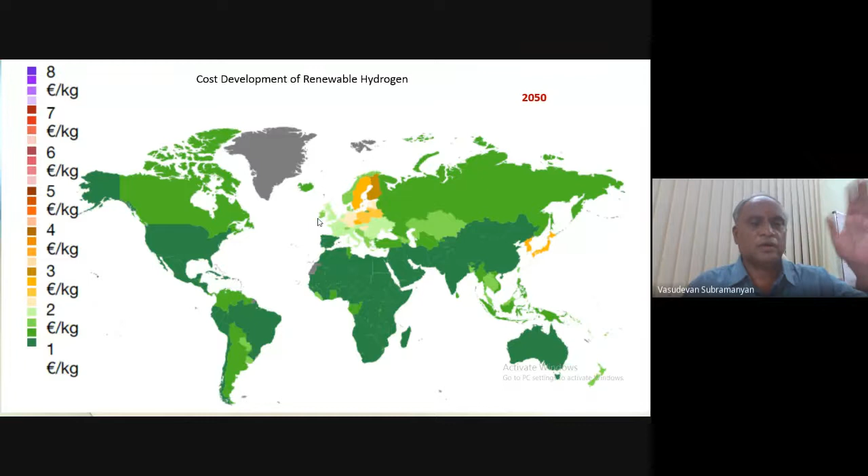So the hydrogen economy requires marketing challenges, technological challenges. So many things are there for the hydrogen economy challenges.

It is very happy news that everybody knows, in the union budget, our finance minister said: I propose to launch a hydrogen energy mission to generate hydrogen from green power sources. This is happy news for India.

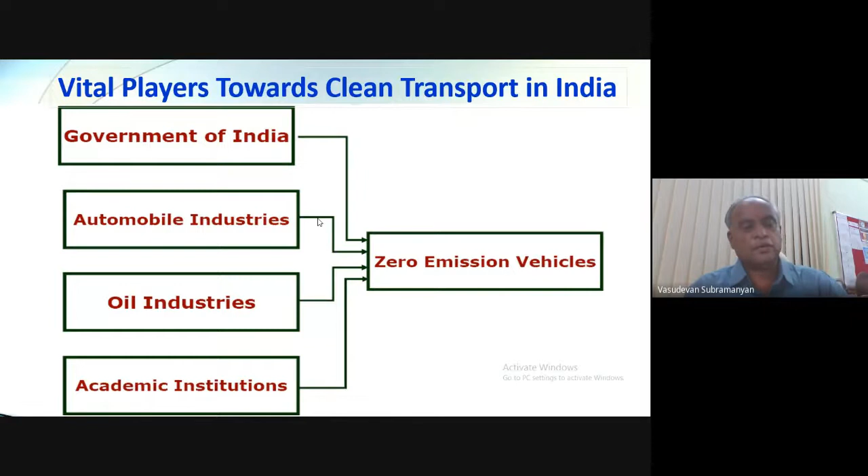So if we want zero emission vehicles, the government of India, automobile industries, oil industries, and academic institutions all will combine. If we do the research, only then can we go for the energy mission. This is all the figures I wanted to show.

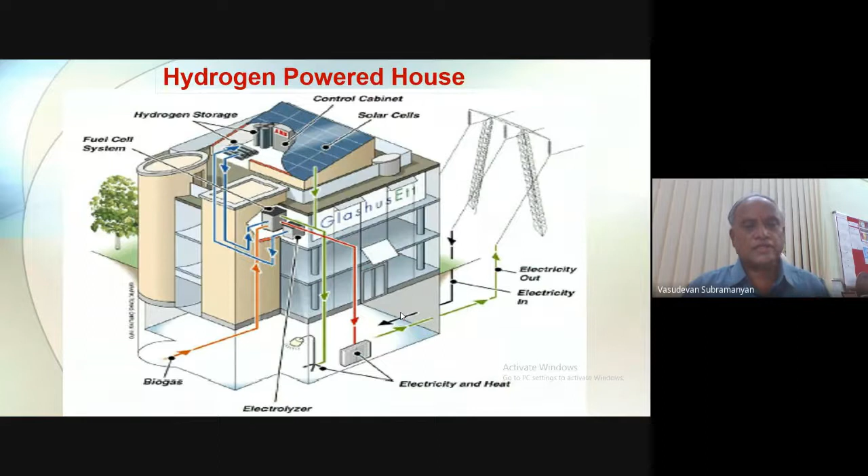This is the hydrogen powered house, using PV, electrolyzer and fuel cell. And this is very latest: last month US installed a 1,600 kg capacity station for electric vehicles.

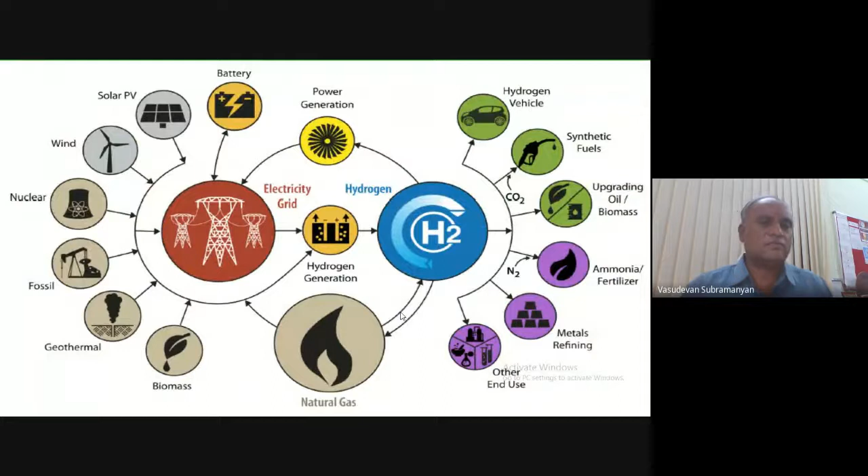Safety-wise, it is very, very safe because hydrogen is a light gas, it will burn on the upper side. So it is well known that hydrogen will be utilized in many places for energy production and other things.

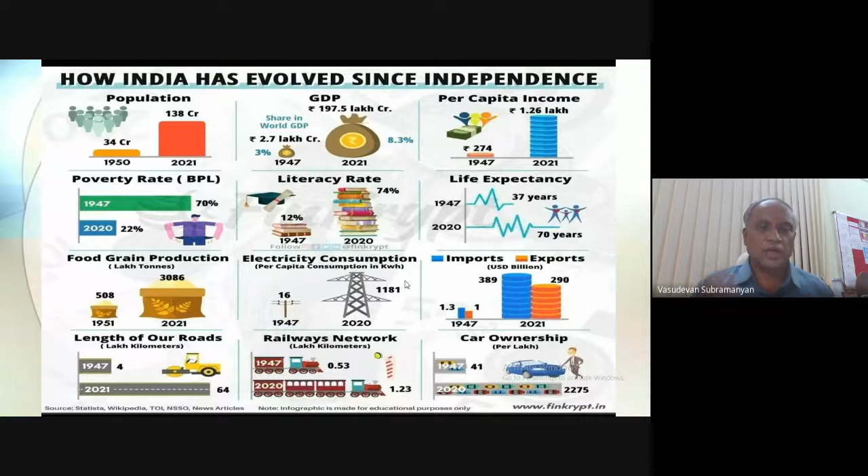You can see the status of import and export, which is also very good for hydrogen. I am sure you can see how India has evolved since independence - population, GDP, per capita life, so many things, India is ahead after independence. I am sure that in renewable energy also, and hydrogen also, India will evolve in the right direction.

I can close with Mahatma Gandhi's thought: Science to be science must offer the fullest scope for satisfying the hunger of the body, mind, and soul. Thank you very much for this opportunity.

Thank you very much, Dr. Vasudevan. In fact, we are very proud to have a scientist like you, Dr. R.K. Pandey, Yuvraj Kothari, and even Dr. Ajay Misra, I would say, all are in a real sense developing fantastically. So it was a great session today, highly knowledgeable session today, and we know that you all are a treasure of knowledge. So even we will formulate one single day specifically.